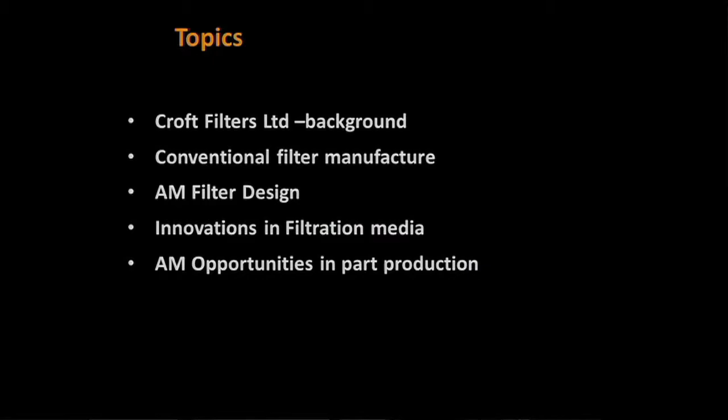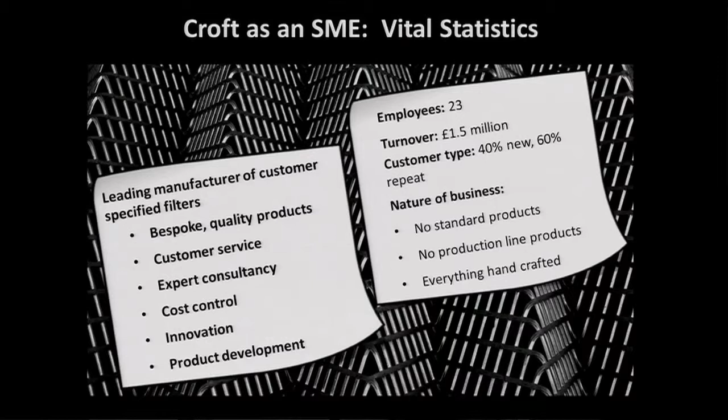So basically, as a group, we're employing 23 people. We're turning over £1.5 million to £2 million. We have 40% new customers and about 60% returning. We have no standard products whatsoever. We have no production line, as you'd recognise a conventional production line, and everything's handcrafted.

What we do offer is we offer customers bespoke solutions for their filtration problems. So we're very, very lucky in that we get people phoning up saying, I've got a problem, it's a filtration problem, can you solve it please? So that gives us an opportunity to do things our way and to get the customers satisfied.

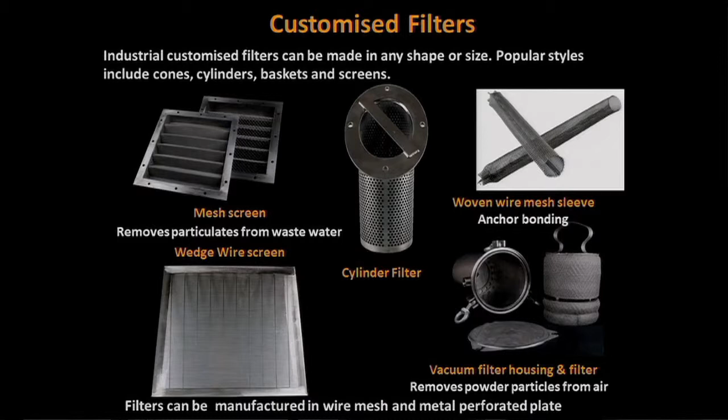So basically, for the last 29 years, we've been working with woven wire mesh, perforated plate as our main filtration ingredients as such. We also have wedge wire and some knitted mesh that comes along. Basically, most of our stuff goes out as cylinders or witch's hat configuration, and there's a limited amount in flat panels.

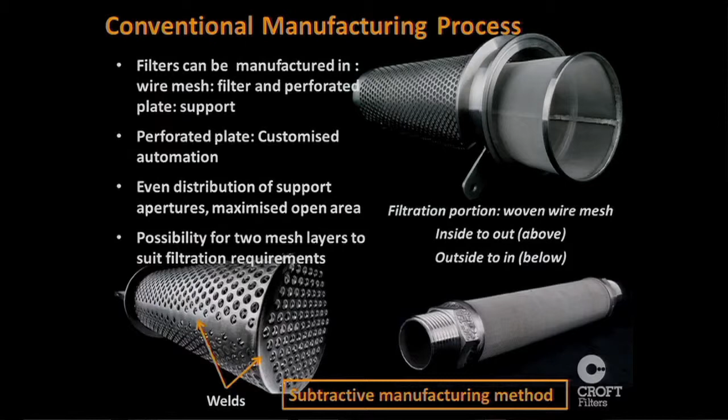On the conventional process, all my life I've been asked for strength and open area. Conventionally, those two don't go together. You either have a product that's strong with limited flow, or you have open area that just hasn't got the strength. So what we do in the main is anything that's perforated, we perforate in-house on turret punch presses, and that gives us solid areas to weld to.

It also gives a solid area to weld the mesh to, which is a resistance weld normally, and this gives a quality, so we're guaranteeing a seal, and there's no bypass in what we do. There's filters that go in to out, filters that go out to in, but what the customer needs is what we supply.

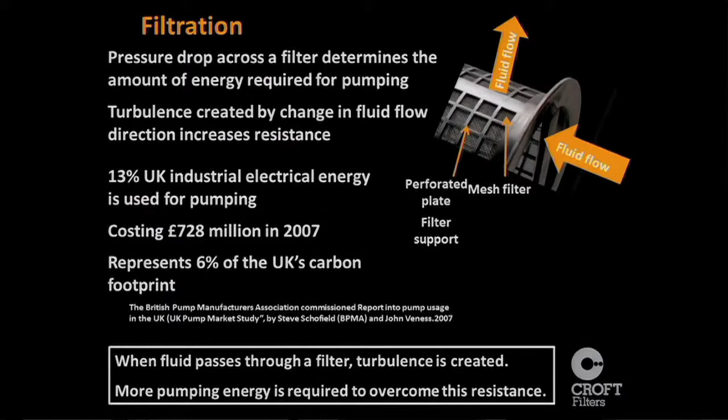We realise that the pressure drop across the filter is an important factor, and 13% of the UK's electrical energy is used in pumping, which is around 6% of the UK's carbon footprint. So my brother had the great idea that if we could look at doing something with the filtration and put the holes in line, then we could reduce the amount of energy required to pump anything through a filter.

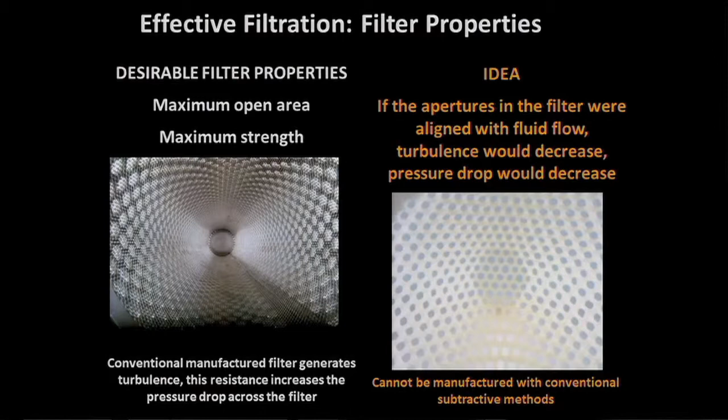So we tried lots and lots of different things. We tried drilling. We knew what we were trying to do. We knew we were trying to get the holes in line. So the CAD drawing was literally an outer ring and then a selection of circles looking at it end on. But like I say, we tried drilling, we tried laser, but the laser couldn't get in tight enough. We tried punching with a lip and an indentation on the back end of the hole, but it just wasn't to be had.

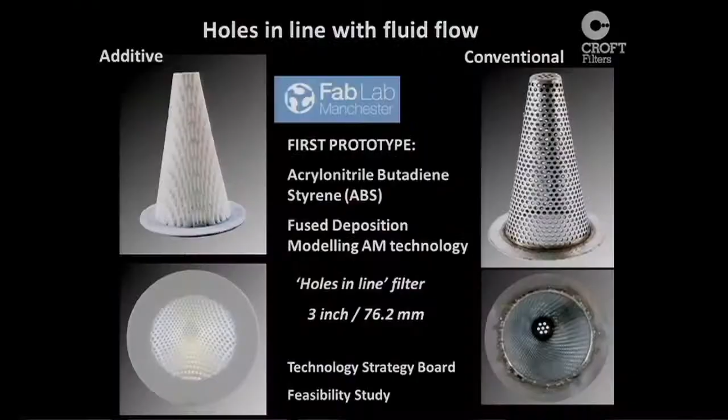It was just impossible to produce. Luckily enough, I was at Fab Lab one day on a management training course, and we were trying to get an egg from A to B in the shortest possible time. Luckily, I noticed a plastic 3D printer in the corner, and at that point I realised that that could possibly do what we were looking for. So that gave us the opportunity

to put the holes in line, as opposed to a conventional filter where the product's travelling along the stream. It's got to take a left turn, got to take a right turn, and then move along with the flow. By putting the holes in line, and the first plastic ABS product looks something like that, it gives us clean flow through, and we were able to do that in a plastic product, which got us thinking as to where do we go to next.

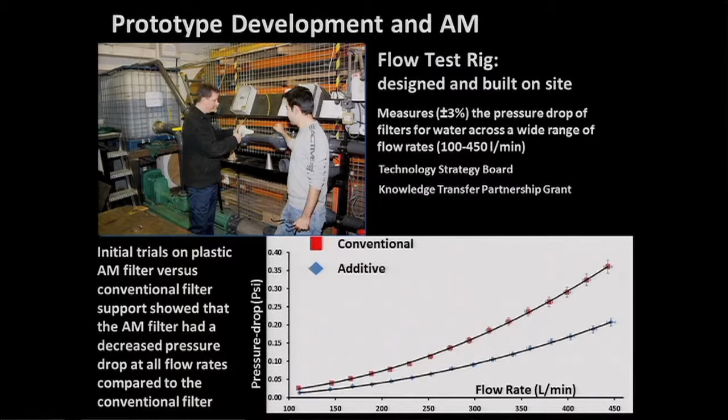We were lucky enough to engage with a project in the UK, which is a three-way partnership. It's called the Knowledge Transfer Partnership, and it involves a university, a graduate and an SME. And basically, the university kind of put the programme together to line up with what you want as an SME, and the graduate comes and does it with the supervision of the university. So we were looking at putting into place a test rig and developing this type of filter, which would give the improved flow.

At that point, we started looking at additive manufacturing. We knew that plastic wasn't where we were at. Most of our stuff's in stainless steel. So we looked at additive manufacturing, and we were looking what it could offer us as an SME.

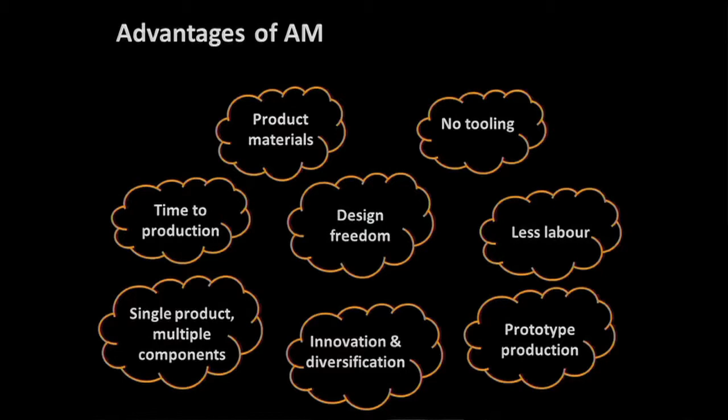So we identified that there's the design freedoms, less labour, the prototype production would be absolutely ideal for what we're doing, in that the most common number that appears on an order to Croft is the number 5 of. So we're making small batches, so additive is beautiful for this. So we're looking at what materials we could use, what the time was, and could we take multi-product components down to single product, and it gave us lots of opportunities for innovation.

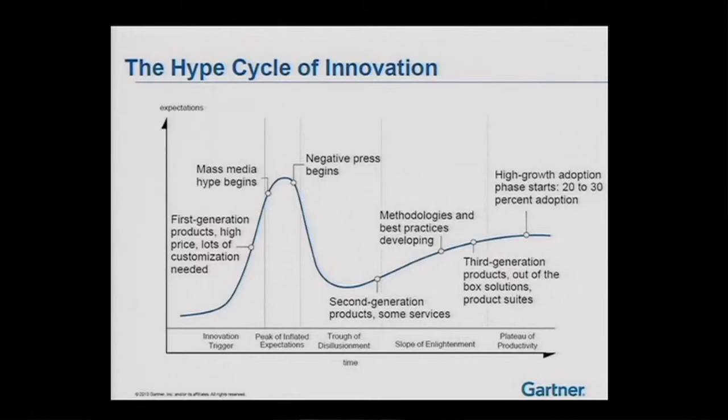We had a quick look at the Gartner hype cycle, and we realised that where we were was on the rise, first generation. We kind of were thinking that we were ahead of ourselves, and when we look at the Gartner hype cycle in 2011, we've got the plastic 3D printing on its way up on the technology trigger. No mention of metal as a separate item on there. They just lump everything together as 3D printing.

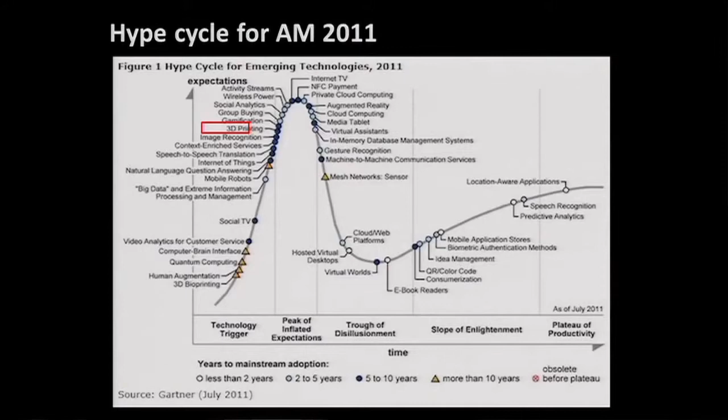So at that point, we decided to take this huge step, bearing in mind we are only turning over €2 million. We decided to invest in an additive manufacturing machine. And because we'd had some work done by the Design Council based in the UK, we went from being a partnership where the big boys couldn't see our accounts, and we then went to two outfits, which were Croft Filters Ltd and Croft Additive Manufacturing Ltd. So we've now invested in a Realizer 250 machine.

Why did we get a Realizer? We looked at quite a few of the producers that were around at that stage, and the choice for the Realizer was because it was the best machine in those days for putting two layers next to each other, leaving a control gap. Basically, we sell apertures, so it wasn't how good the finish was when you put everything together, it was how good the finish was when you had two manufactured lines that were separated.

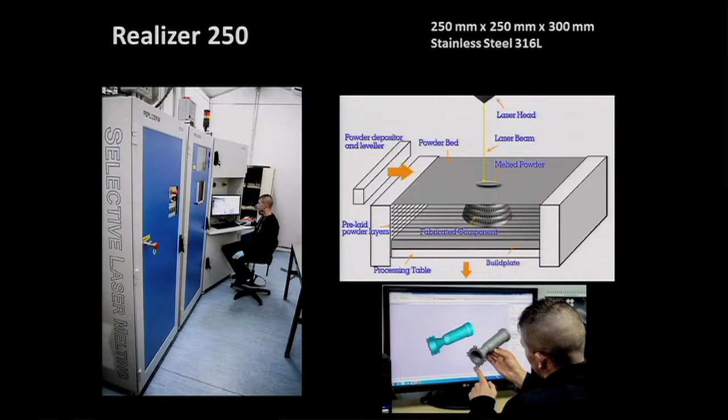So we've got a Realizer 250, which means the build box is 250 by 250 by 300 mil deep, and we decided that we're going to run stainless steel 316 as the only product that we would run in that machine. Now, whilst the manufacturers say it can be changed, and we fully agree with them, to actually change the material over on that type of machine is not easy, and if you came along with a £50,000 order, then we'd switch to titanium tomorrow. But as we are at the moment, we're looking purely at stainless steel, and we don't think it's worth the risk of changing that material in that machine.

Given our time again, would we buy the same machine? Perhaps not. Perhaps we'd have gone for a cheaper machine that offered a powder change, so we could change the materials. Perhaps that's something that we would have looked at. Ask me again in 2 or 3 years' time, and I think we might say we made the right choice for the Realizer.

So additive manufacturing, firstly, it is not plug and play by any way, shape or form. We're lucky, we're fairly innovative. My business partner and fellow director are fairly switched on with the CAD side of it and also the laser tweaking. We got a machine that was fully open to us in that we can adjust all the parameters, and we do get support from Realizer for that, but in the main we control that ourselves. So the variables for the laser are the intensity and the duration. For the powder, the type of powder, which we chose stainless, and the layer thickness.

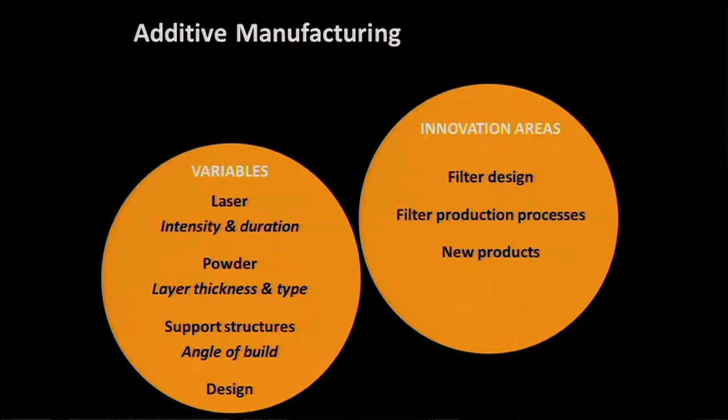There's also decisions to be made on the support structures, the angle of the build and the design. We actually use Materialise software which puts the support structures in for us, but there is a bit of flexibility in that we can redesign the support structures that are automatically generated. For the innovation areas, we thought that filter design was the obvious thing that we were going to move forward with, but we're also looking for other products. Croft Additive Manufacturing is looking for other products to build and to get involved with.

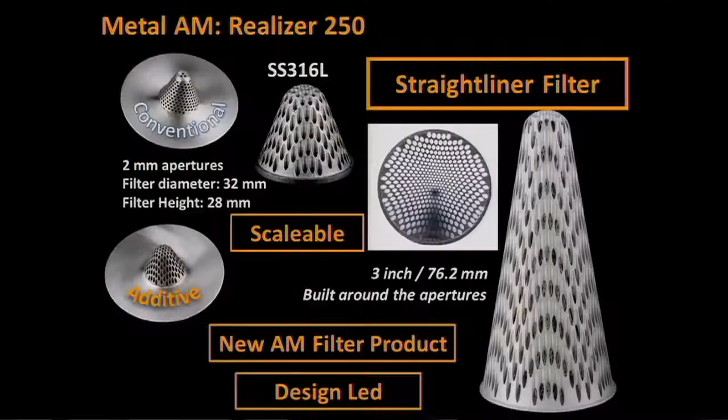We have now got what we call the Straightliner filter, which is the one with the holes in line. And the additive gives us the opportunity to, it's scalable. We can go from a small one right through to anything that fits on a 10-inch build plate by 12 inches high. So there really is scope for doing things.

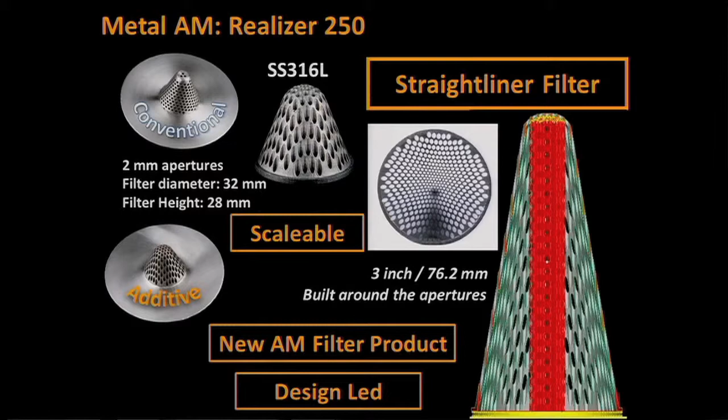What we have to look at, though, apart from not being plug and play, there's the dirty secrets. So we have the support structure. Because this filter has got a domed end on it, it needs supporting. If it was at 45 degrees, it would be self-building, but because it's domed, there's the centre point that needs a support. So the dirty secrets have us creating this support structure up the middle, which is just there to allow the build to go over the top. So the hype of you using everything is not true. That's just scrap that's generated during the process of building that filter.

The Straightliner filter actually does offer improvements. The pumping energy is reduced from the conventional, the fluid flow rate increases. So we are definitely doing something that is going the right way, and it's offering decreased carbon footprints to the end users.

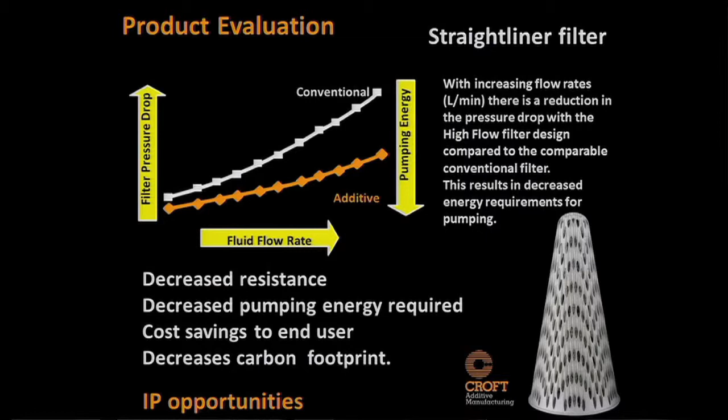We were lucky enough to be picked up by CERN, in that locally the Science and Technology Facilities Council had a joint venture with CERN out in Switzerland, and we were the first company to be on a business incubator, and we get support from CERN, and we're putting stuff into CERN at the moment, and we're having that tested. A lot of the stuff they do is on vacuum engineering, and we're having additive products in stainless steel now passed for use on vacuum engineering. That's quite an achievement for us.

We also do quite a lot of work with Lancaster University, and they've supported the trip here today. And what was the Technology Strategy Board, now called Innovate UK, has given us 3 different grants for working on additive manufacturing. The one we're currently working on is a finishing grant, because basically the first couple of years filters didn't need finishing. So now we're working on a £100,000 grant for finishing of additive manufactured products.

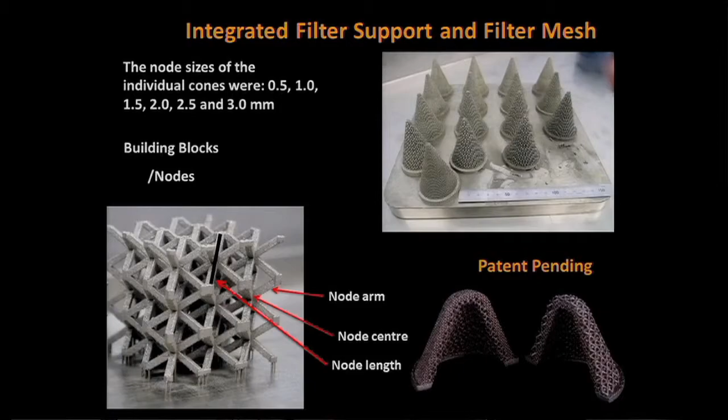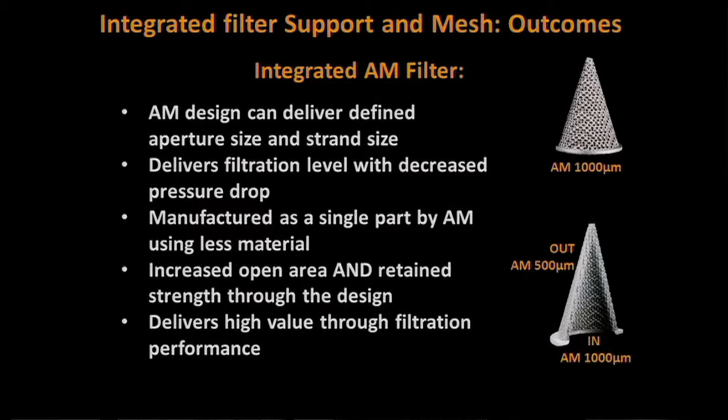The integrated support and mesh really does change the thinking on the filter design. It gives so much more strength with open area that just cannot be obtained by conventional manufacture. So, whilst the cost is slightly higher, for a whole-of-life situation, these filters have got a lot to offer.

If you take wedge wire as a product, this is something we don't actually manufacture ourselves, but we do sell quite a bit of, and it's a bought-in product to us with a lead time of 4 to 6 weeks, which absolutely kills us in that 60% of what we do goes out in 6 days. So to have a product where we've got to wait 4 weeks for the raw material to arrive before we can do anything with it is a real killer. So we've started to look at what we can do with wedge.

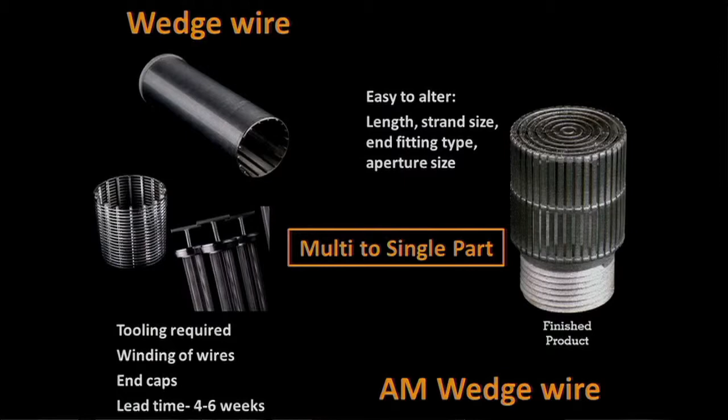Normally on a wedge product you'd have a fitting at one end, a threaded fitting perhaps, with an end cap on the other end and the wedge tube in between. A real problematic thing to weld up, because you've got a spiral of wedge that tapers to nothing. You go to that with a TIG torch and it just disappears on you. You're chasing the thing round, you're putting filler in. It's not good. What we've been able to do with AM is build one-piece construction.

This is built that way up, and as part of the dirty secrets, we've got a slightly messy face there which was attached to the build plate. We've also got a slight problem with a step there, which has happened because on the build there's that much heat going into it, it's pulled it in. So we know about that now, so we build at 92 degrees, so when it is pulled in, it meets up perfectly with the support ring that's going round. So we're back to dirty secrets of additive again. There are things to be very much aware of. But that gives us a multi-part to a single part product.

We've also got these here, which are custom made. Customer takes 4 as a batch. That's his order. We build a spare one. If he wants to alter the size, we can alter the size. He wants to alter the fitting, no problem. We can just alter that. It's just a CAD thing before we do the build.

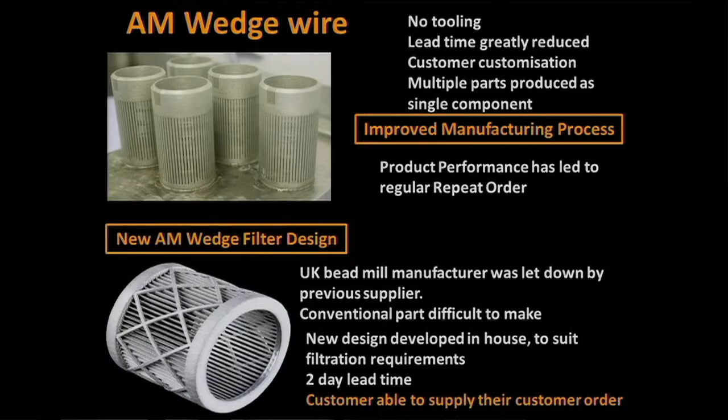We recently had a local company who make bead mills. They had an order going out to the States. They'd been let down by the wedge supplier. They came to us and said, "What can you do?" We designed something that was completely different. We put the support on the outside, so that's going from in to out. We did the design, we had it produced in 2 days. Customer's absolutely delighted, couldn't believe it, because like us, he was used to having wedge in 4 to 6 weeks. And he's repeated on us several times since.

Another product we have, a standard conventional product, is a way of making a woven wire mesh disc safe. So we put a U-section edge onto the disc, which makes it handleable, and you haven't got the sharp edges. The problem is when you're doing this, you've got a U-section and you've got the mesh going into it. You've got bug points, trapping points there, so cleaning it is an absolute nightmare.

We very, very easily switched that to an AM product, and basically we're building a solid rim, so it's not a U, it's solid. The actual meshes are square apertures, so we haven't got the overlap with the bug traps on the woven. We've just got the square apertures, which are relatively easy to clean compared with the conventional product.

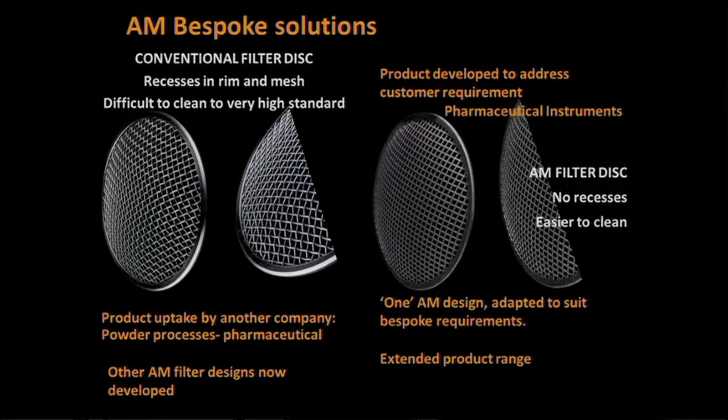We do quite a bit of combining. Customers aren't really ready for additive manufacturing yet. If you tell them it's an additive manufactured product, sometimes they're very, very wary of it because they think it's untested. Quite often we use additive without telling the customer that it's an additive component in there.

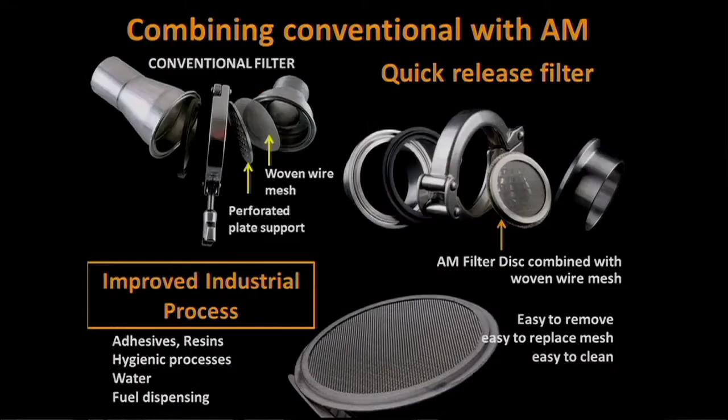So here we're using a relatively easy inline strainer to put into place, and it's got quick release, so you can change the filter element or clean it out. And we're using this as the holder for the woven wire mesh. There you can just about make out it's got a square grid behind it, and the big advantage is that you can change the mesh size very, very easily. You just flick the mesh out, put another mesh in.

So if the customer doesn't know what size he wants to filter at, this is a great way of testing. And we're also getting an additive product into the marketplace. So when we're speaking to him later, we can say, oh, the support, the mesh holder, that's an additive manufactured product. So we are getting the product out there in a discreet sort of manner.

So what have we got from additive manufacturing? We've got new products that have come along, we've got new manufacturing processes, and we've got improved filtration. We believe that additive is a fantastic thing. The world's not ready for it yet. Finland seems a little bit more advanced than the rest of the world. I personally believe that we'll go from having half a machine too much to being 7 machines short in the period of a week. I just don't know which week, but I think it'll happen.

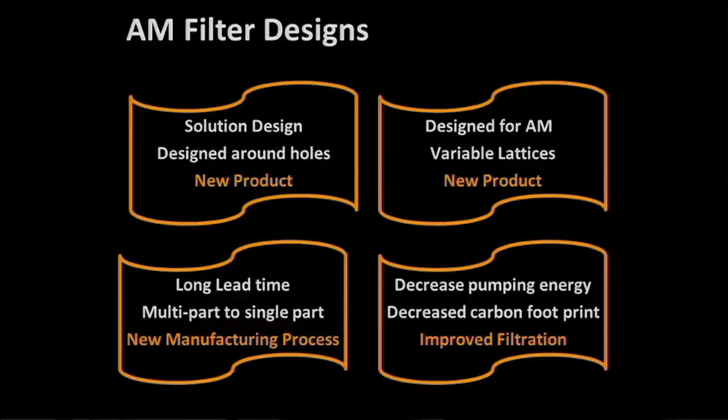One of the things that Croft Additive have hit on is the development for a designer who's manufacturing shoes. This designer identified the fact that it was 100 years since the trench boot was used in World War I, and he wanted to combine that technology with the latest technology available. So he came to us and said, what can we do on additive manufacturing to bring these shoes up to date, but basically working on the old design.

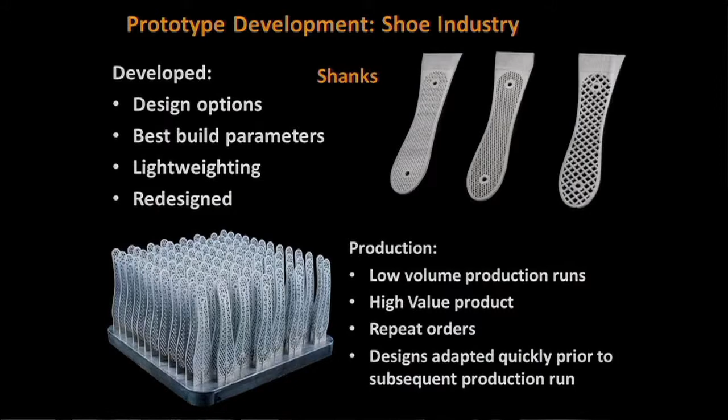So we made the shanks for him. It took quite a bit of developing. It was literally straight off the back of a fag packet. It took us about 6 or 8 goes before we got something that was absolutely right for him. There were issues on sewing, and needles were snapping if they weren't going in the right place. But eventually we got there, and we managed to do it as a low volume production run. I think there's 80 on the build plate there.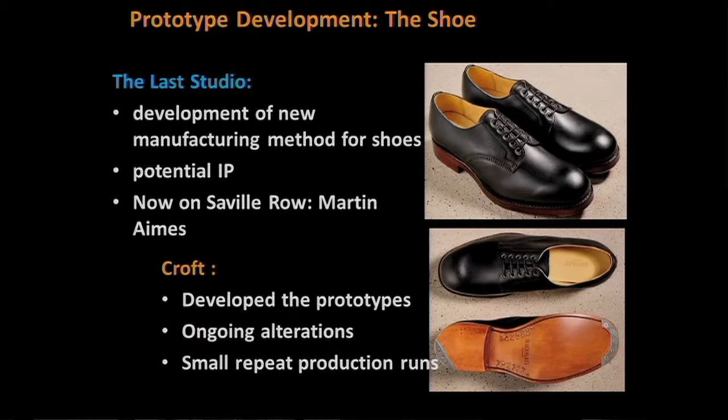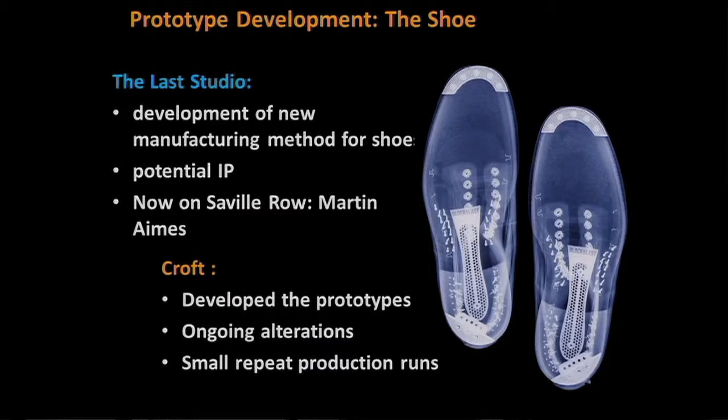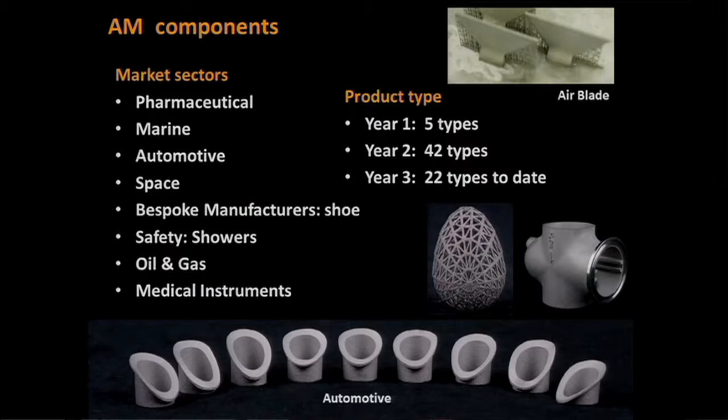What industries are we working with? The market sectors that we are hitting are marine, pharmaceutical, automotive, space. We're lucky enough to be working with the UK people on a grant for a product that's going into space. We've got the shoes. We have safety showers. That's a really interesting one because the machining of the shower head is an absolute nightmare, and it can be done relatively easily with additive. The only problem is additive's not ready to build in the quantities that the industry requires. We're also working in oil and gas and some medical instrumentation. We're bringing on different product types on a year-by-year basis, and it is quite interesting to be involved.

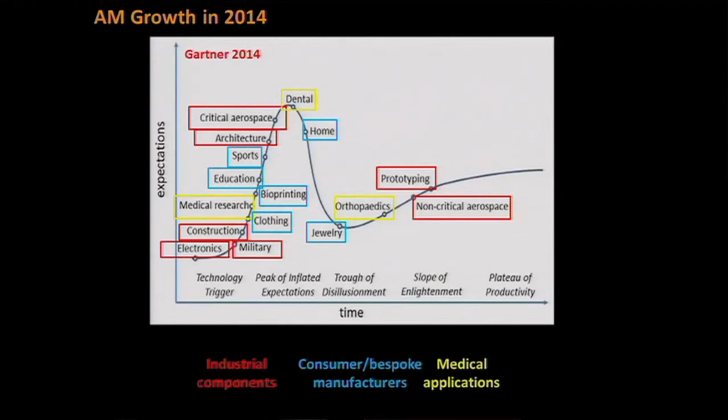So Gartner has now produced his own graph based on where the market's up to, and I agree with some. The crazy thing is, the risk-averse industries, which are medical and aerospace, have gone through all the hard times. Dental, I totally disagree with dental. I think that dental should be down here somewhere because dental's been around for a long time. But there's a lot of stuff on the technology trigger side, and it'll be interesting to see where that goes.